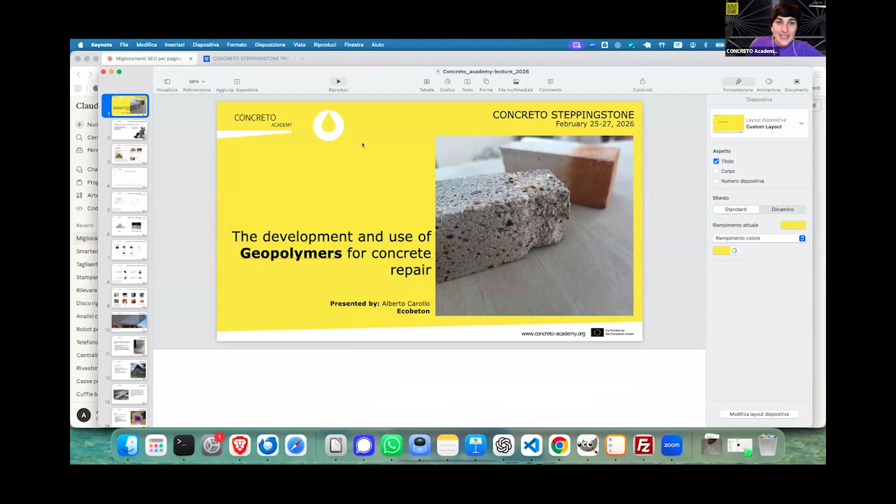I hope to find out a way to share my screen with you. So probably this one. Yes. Hopefully with your geopolymer we can resolve some of us that have been starting to corrode here, as this is our last session after we have been bombarding them with quite a few intense sessions the past 3 days. So I think your lightweight material will hopefully illuminate us. Okay, just give me feedback. Do you see the presentation? Yes, yes, you're set. Oh, perfect.

So, geopolymers, speaking about a little bit of chemistry after the lunch break is fantastic. So keep everybody up and running.

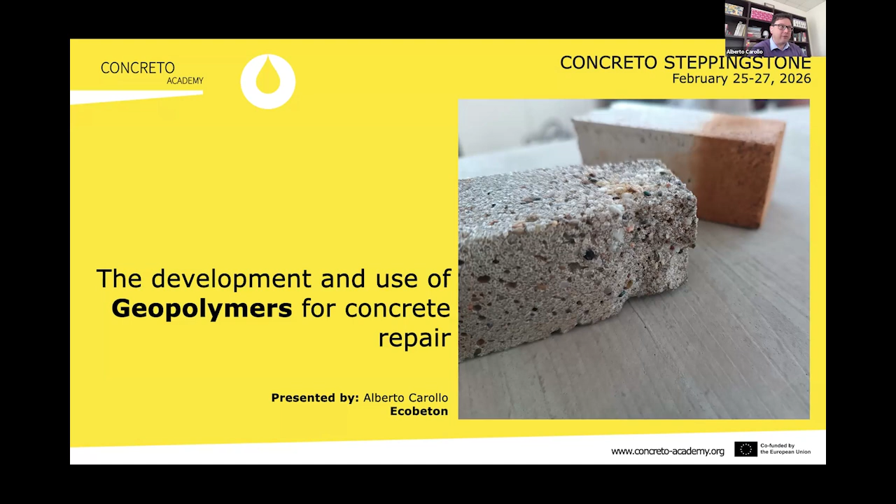First of all, geopolymer is a very old word. I mean, this word was invented about 50 years ago. Anyway, I'm pretty sure that few of you have ever met them, because even if there are some products, specifically this morning products like Geolite were mentioned that sound a little bit like geopolymer, it is not. It is a very good name, but has nothing to do with geopolymer technology. Just to make that clear.

So, geopolymer science was started by this French scientist, Joseph Davidovits, many years ago. And you'll find a lot of information at this website I wrote, geopolymer.org. This scientist was a polymer scientist. What does it mean? He was dealing with plastics, rubbers, and all this kind of stuff. Varnishes, polymers are around us, particularly organic polymers. And the problem was that all these kinds of polymers were burning.

So fire was a big issue for big cities like Paris or London or Los Angeles, where he also worked. So he was searching for a way to build a polymer that does not burn, that is fire-proof, fire-resistant. And the conclusion was that it cannot be. Organic polymers cannot be in any way fire-resistant. However, he found a way, and we're going to see that way, to have an inorganic polymer. Okay.

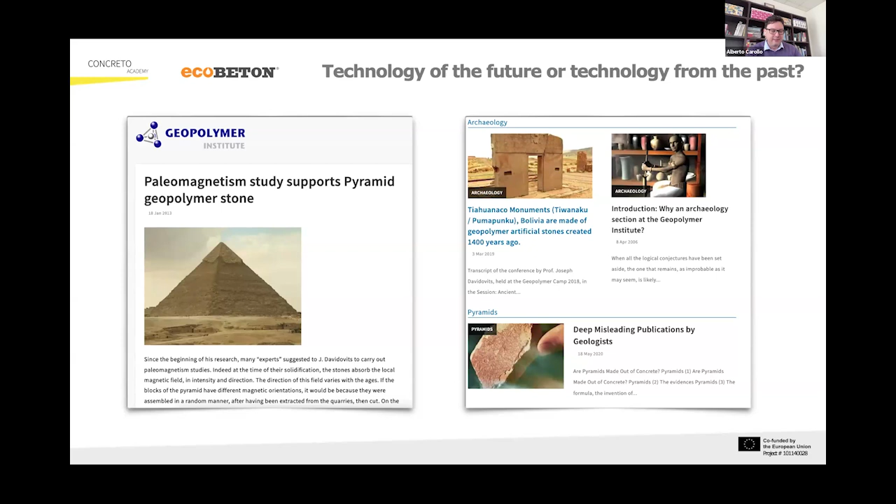So what is a geopolymer and why should you care? First of all, it's a polymer. What does it mean? A polymer is a material that consists of very large molecules, or macromolecules, that are constituted by many repeating subunits. So you get a subunit that repeats, and it is called a monomer. And it is very common in plastics, like polystyrene, and also paints, resin.

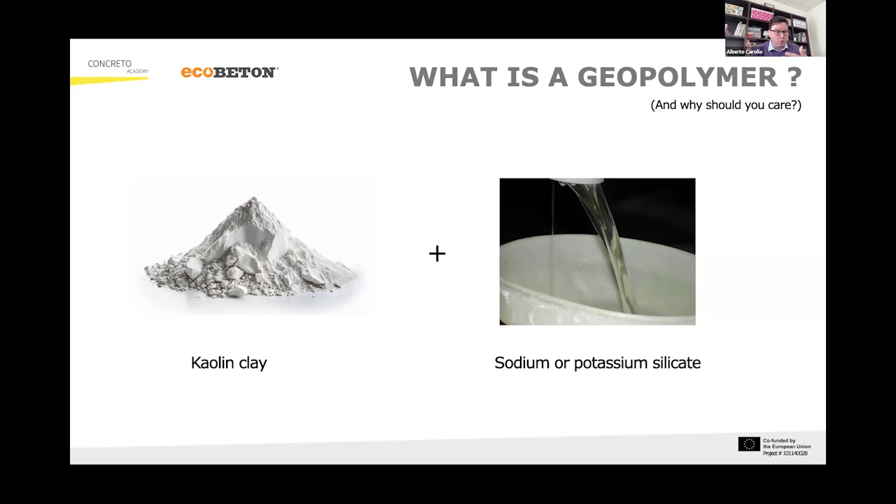And what can you do then with that? You can cast objects like vases; Professor Davidovits is convinced that ancient vases were cast like this. Or you can do fiber composites. What does it mean? For example, you can have carbon fiber composites or glass fiber composites to make such objects.

For example, think about Formula One racing cars, Ferrari, McLaren, and so on. The final part of the car where the fumes go out, the exhaust tube, was made in carbon composites. But the problem is that the higher the temperature of the fumes that go out of the engine, the better it is for the performance of the car.

Carbon composites can stand only up to 500-600 degrees Celsius maximum. So nowadays, all the cars in Formula One racing have this part made of geopolymers. It's a French company that is making it, okay, and they have this system.

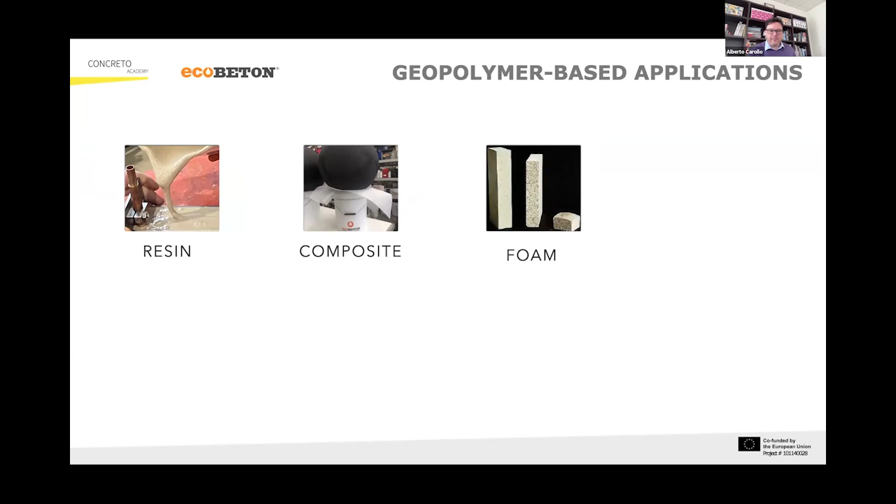This is a French artist that is doing a lot of stuff with our products. You can have foam also, and this is a particularly interesting field of application. All the scientists are working on this foam because you can have insulation that does not burn at all. You know how big an issue, how big a discovery. It's still not mature, but everybody is following this one.

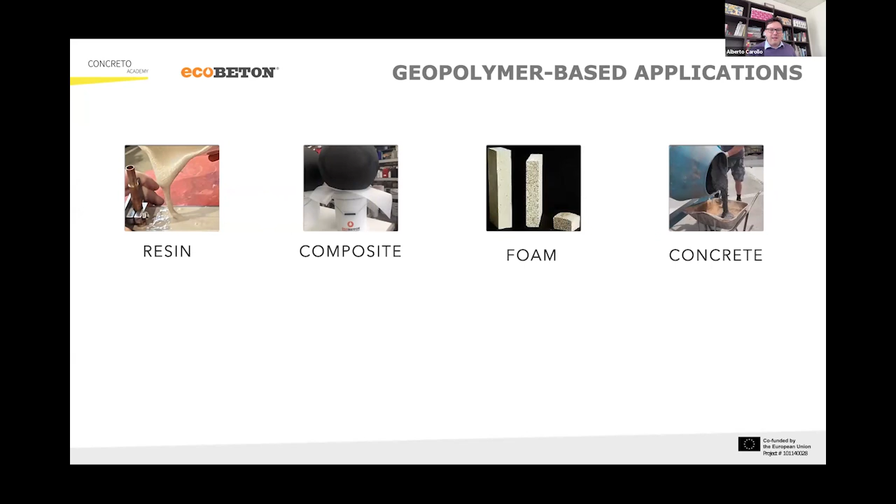And then concrete, of course, it looks very similar to normal concrete. You can use it to do thermal insulation, so to protect stuff from heat. For example, in ceramics, when they cast iron, to contain a liquid metal, we use geopolymer nowadays.

There is a project for planes, to make fabric, I mean, for the airplanes, to reduce the flammability of all the components. This has been going on for some years already, and I believe some companies in the United States already started with that one.

And you can use it to encapsulate any kind of stuff, because geopolymer is very stable from the chemical point of view. So you use it for waste treatment, even nuclear waste treatment. There are some specialized companies doing that with geopolymer. So pretty wide application, right?

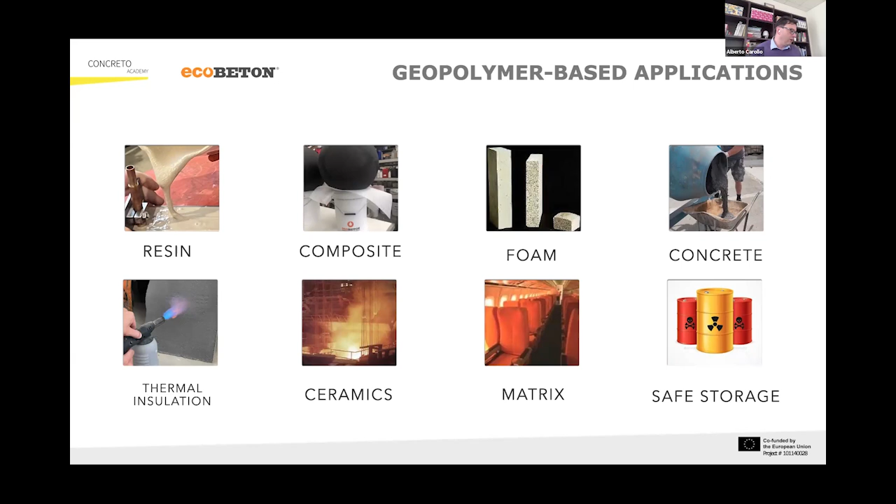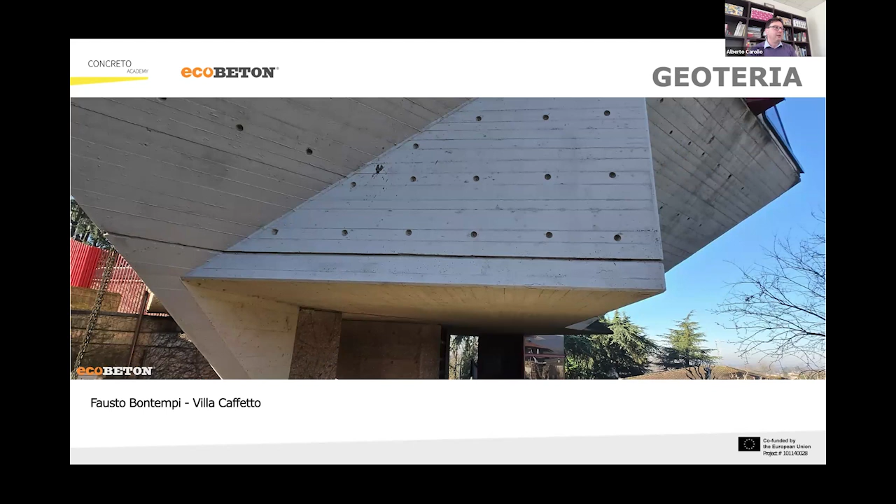What I'm going to present to you today, before it's too late, because I see time is running, is using geopolymers for restoration, retrofitting you can call it, the restoration of historical modern concrete of the last century. The product is called Geoteria, and we want to develop, we are at a very good point, a repair that can last longer than traditional repairs. Because what we notice is that once you repair the concrete, that repair does not stay as long as the original concrete. The repair lifespan is very short.

Okay, to significantly lower the footprint, of course, and to have something that you can apply at any thickness. One of the properties of geopolymer is there is no water inside. It's not a replacement of cement. It's another thing. Cement is another mixture, and geopolymer, from a chemical point of view, is an ordered structure. So it's completely another thing. It is better that you think of geopolymer more like a plastic, if you want, than a cement. And so there is no shrinkage.

There is no shrinkage, and this allows you to apply from 1 millimeter to 20 centimeters in a row, because shrinkage is another big issue for concrete repair. And of course the ability to reproduce the texture and color that you want. We are in the field of restoration, and these objects are very good. We don't want to patch them in an Arlecchino way, okay?

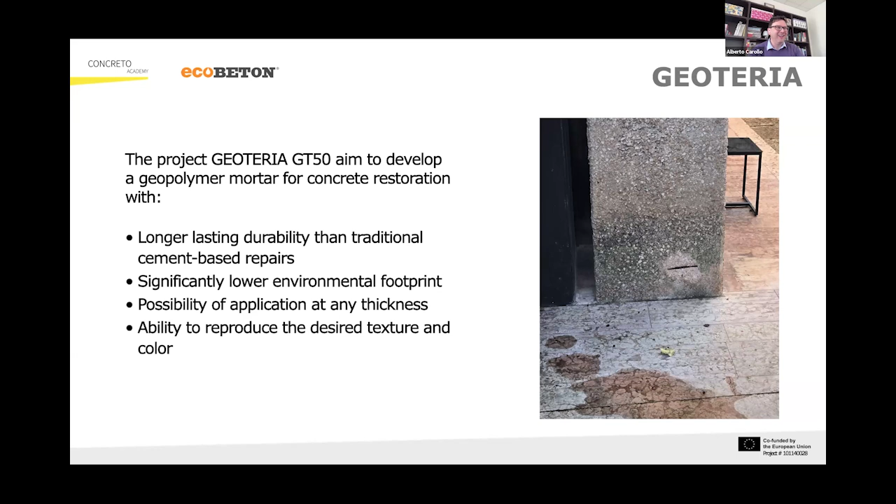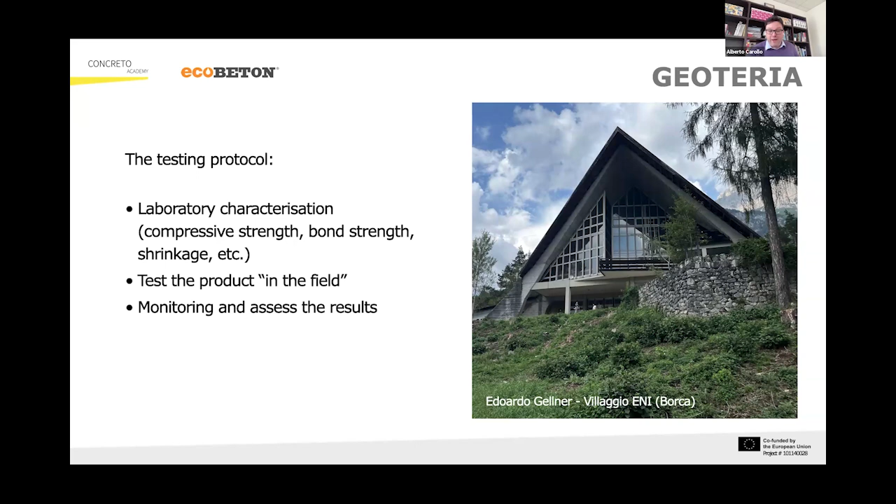So we were very lucky because we had the possibility to test the product on real concrete from the last century. I'm talking about this concrete from Villaggio Eni, that is near the Olympic area. It is a project from architect Gellner, who was one of the, let's say, friends of Scarpa in the Venice team. In fact, Scarpa did a church over there and other things.

Very luckily, okay, not luckily for the place, there was a storm many years ago called Storm Vaia that demolished some minor structures. We are talking about the parking area, if I remember well. And so we were seeking; we knew that the concrete was there, we had to dig deep under a lot of trees and stuff, and then we got the possibility to take this concrete to make the test directly on top of it.

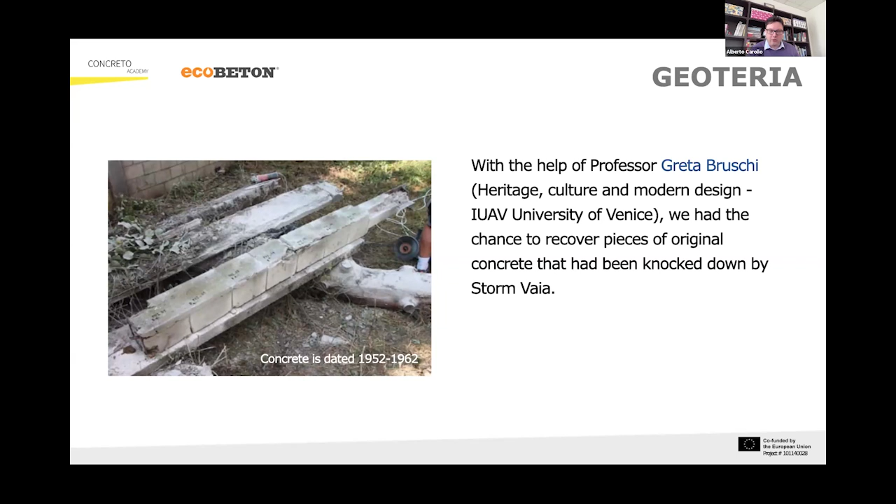And that is very important because the laboratory is very easy. In the laboratory it will always function, or not always, but will easily function. Making a product function on the original concrete is a great opportunity. So what we did was a

preliminary test. We start with the phenolphthalein test, that is this purple stuff that you see on the sample, and this measures the depth of carbonation. Carbonation, I told you before, is one of the biggest enemies of steel rebar in concrete. And it is responsible for starting a chain that leads the concrete to destroy, basically, because the rust is going to grow the rebar and then make pressure on the surface and then cause what we call spalling of the concrete, okay?

So when you spray this product, very easy, where it is purple means the concrete still has a very high pH, so the rebar are protected. Where it is clear without coloring, the rebar are not protected. And you see in this picture, we got 4 rebars, and all 4 of them are, I don't know if I'm able with the mouse. No, okay, doesn't matter. All the 4 rebar are outside this one.

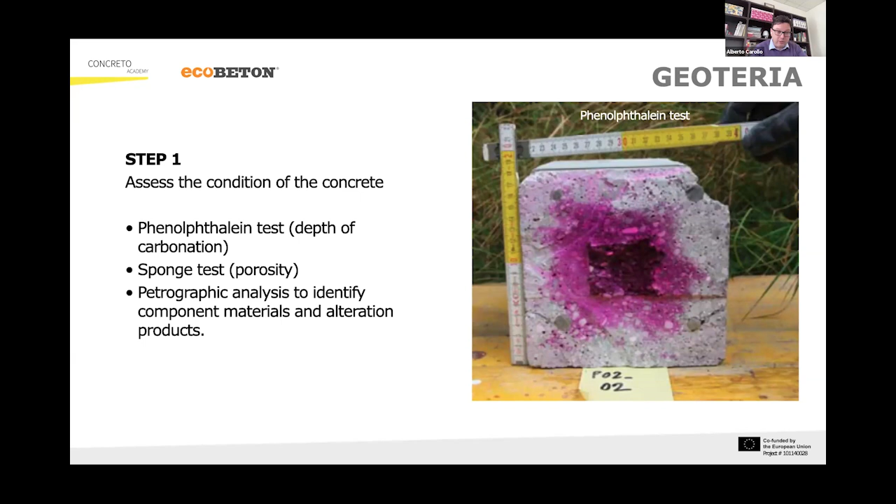Then we do a porosity test and then a petrographic analysis. Why porosity test? It is so important because of the pore volume. Here I put you microscope pictures and you see the voids. These are the pores, because when you make concrete, there is a lot of water inside, and then water eventually evaporates from concrete and leaves a hole, and that is related to durability of everything, because through those holes all the pollution, carbonation, chlorides, everything is penetrating and destroying concrete. So knowing the porosity is fundamental to do a reparation.

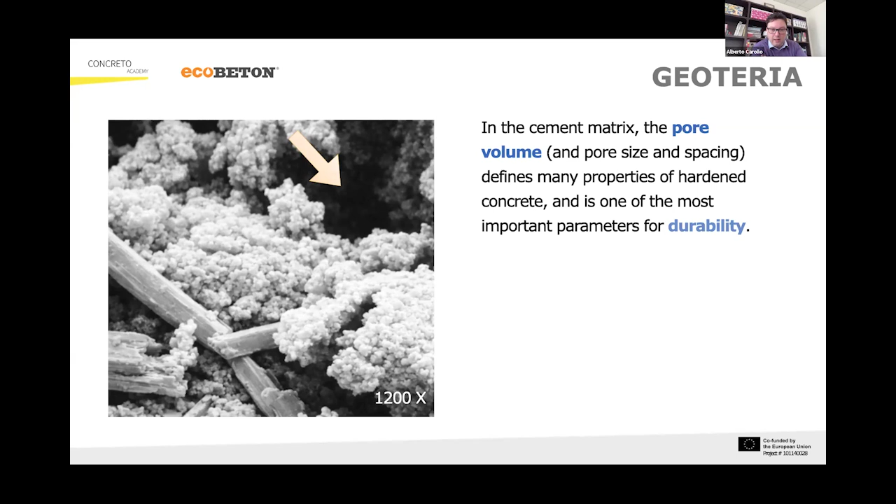And then also this morning, the first professor was showing you something about petrography and analysis. So I'm going fast because I see that the time is going and I don't want to keep it.

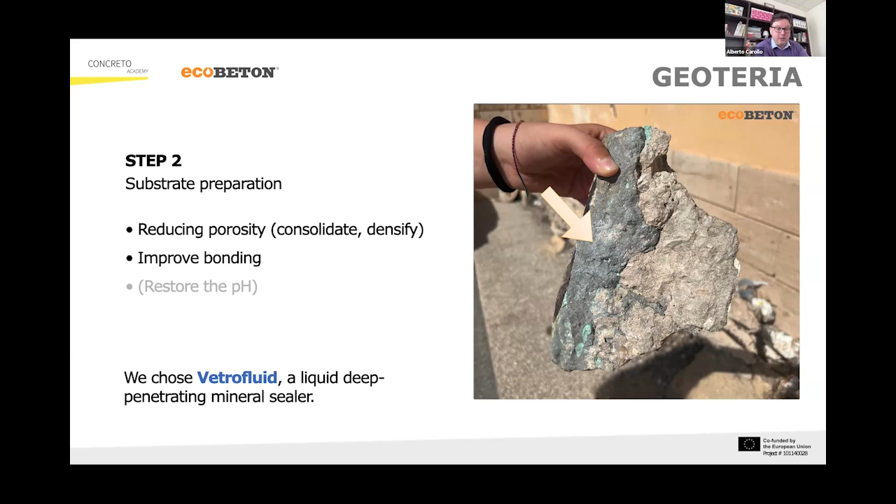So it's not a matter of having good products. It is a matter of having a good system, because very often we observe that after some years the reparation detaches from the original concrete, and it is not detaching at the interface. It is detaching below the interface. So some part of the original material is pulling off. Why? Because of poor substrate preparation. You have to reduce porosity, you have to improve the bonding. Usually you have to restore the pH, realkalinization. We don't need it with geopolymers, but this is a good suggestion for concrete reparation. So we chose a deep penetrating mineral sealer for doing that.

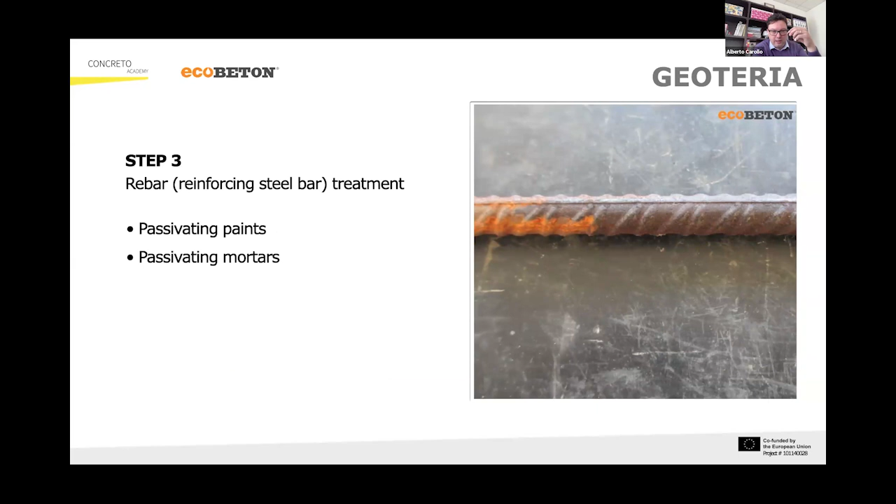Then you have to take care of rebar, because of course rebar are probably already rusted when you meet them. So you got basically three strategies. The first one is passivating the rebar with paints. It's a very old technique. Nowadays, almost all the producers prefer to use passivating mortars, so mortars that already have this passivating stuff inside the mix. What we prefer in any case is to use rust converters, to transform the existing rust into a stable layer, so no further corrosion will go on.

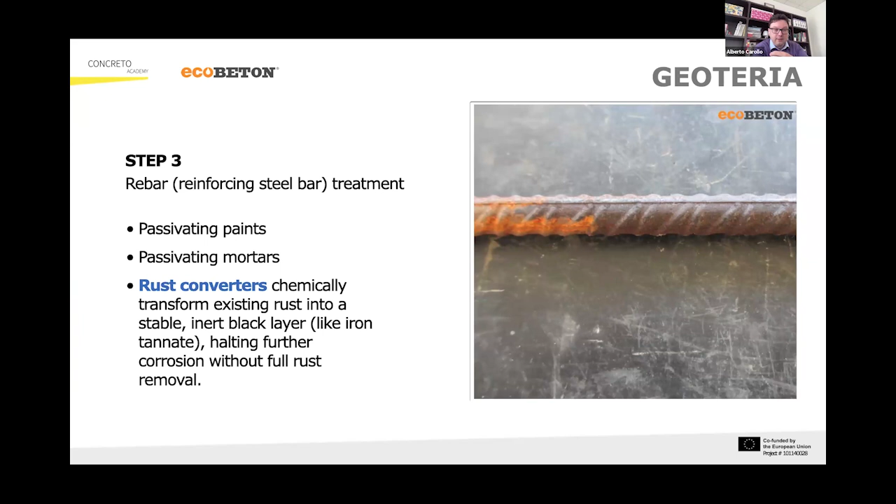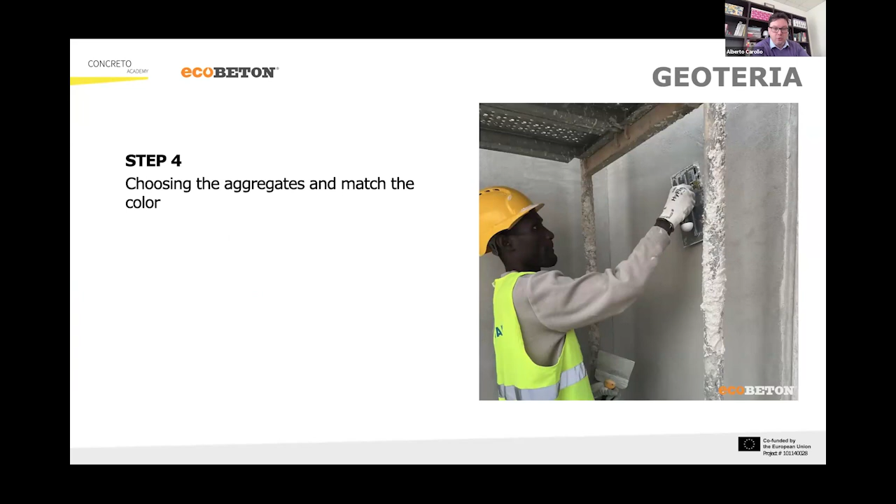Then you go to choose the right aggregates and match the color and do all this kind of stuff. And then you have to monitor the results. And this is exactly what we are going to do this summer. So we got our concrete from last century. We got the geopolymer. We will apply it and then monitor the results in time. And what does it mean? It means make a pull-off test.

On the picture you see what it means. You attach some small circles, and then with the machine you apply a force to extract them, and then you measure how strong the bond is, and you have to look at cracking, at shrinkage, at everything that happens at the interface, or even the color change, because we want to keep the color stable and as much as possible matching the original color, for example. And what happens after freeze-thaw cycles, and what happens with porosity and water absorption, for all the reasons that I told you before.

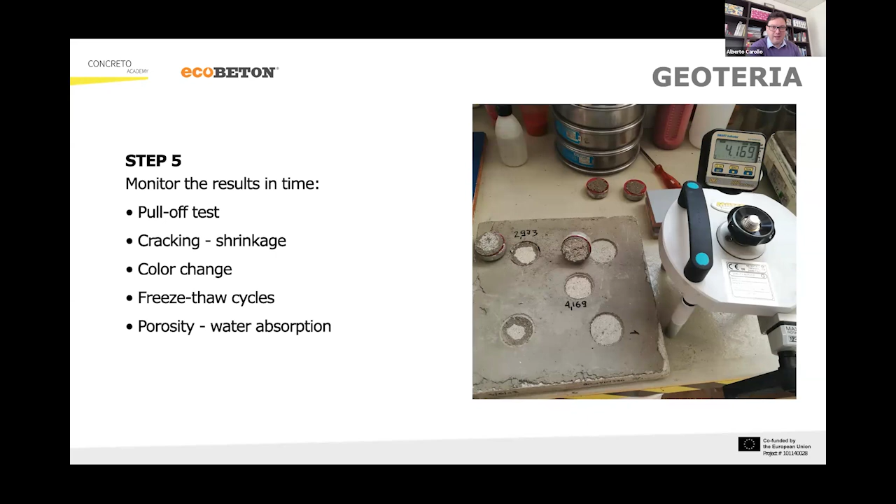Sorry if I went a little bit quickly. I hope I'm still in the time. Yes, don't worry. That's it.